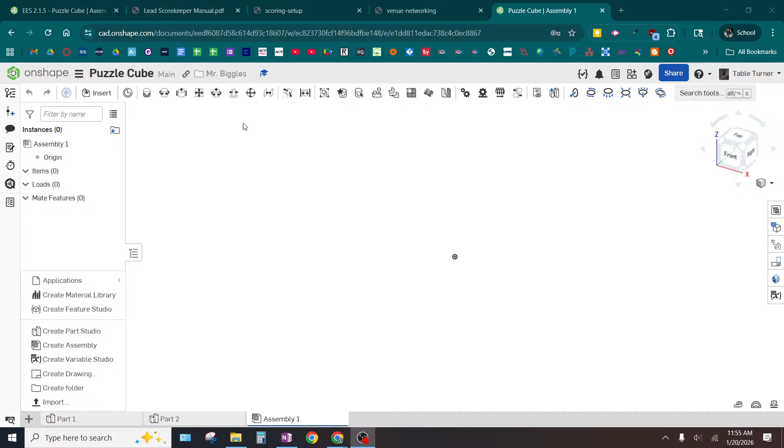I'm in assembly 1. We see that? Yep. All right. You'll notice that the tools up here look very different. And one of the buttons is insert. We see that? Yeah. And if you click on insert, what you'll notice is that there's a tab that says current document. One of the advantages of making all of your parts in the same document is that they'll show up in this first tab.

And they'll be constantly updated. And I'm going to prove this to you in a moment. You're in much better shape if you use parts that are in the same document. You don't have to, though. There is other documents. We see that. Okay, so you could pull things from other documents. It just won't update as well.

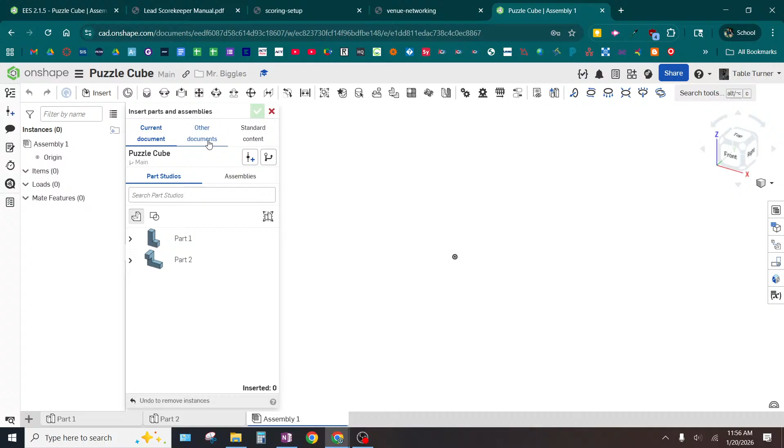And then there's part 1 and part 2. So what you can do is you can click and you can place these over here. Yeah? Okay. You can click and place those. Are we good so far? All right. I want to show you one of the advantages of doing this in current document. What color are these? Blue. They're the default blue? Yeah?

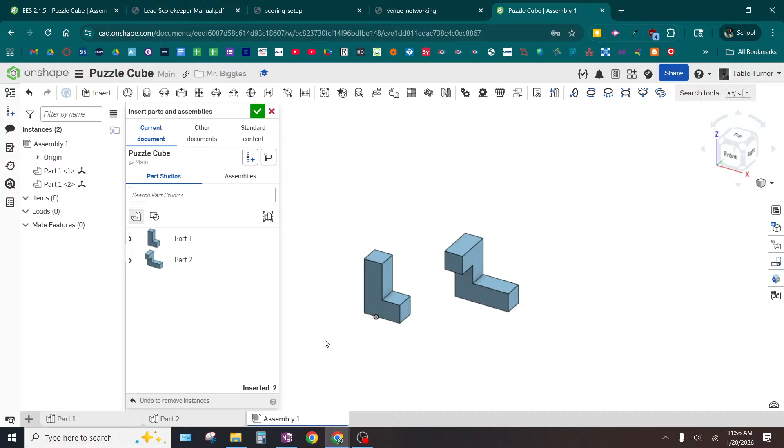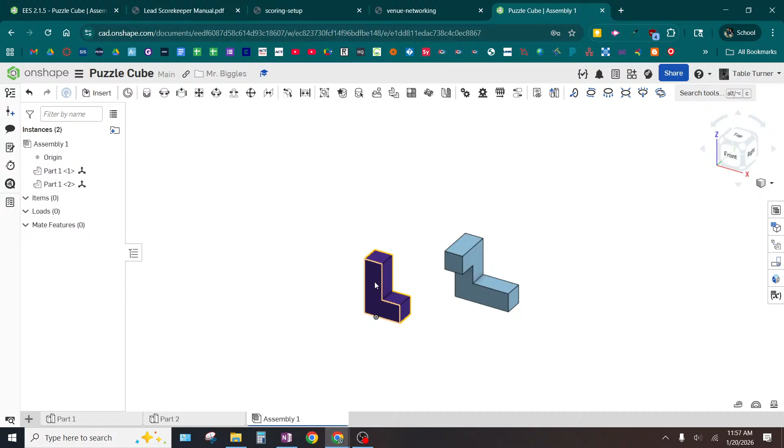Watch this. I'm going to go here and I'm going to edit the appearance. Okay, so I right click on the part, edit appearance. What color should I pick? Any color, boys? Purple. Good choice. So I made it purple. I go back to the assembly and notice how it changed and made it purple. We see that? So it will update your parts. And it does this very well when you have them in the same file.

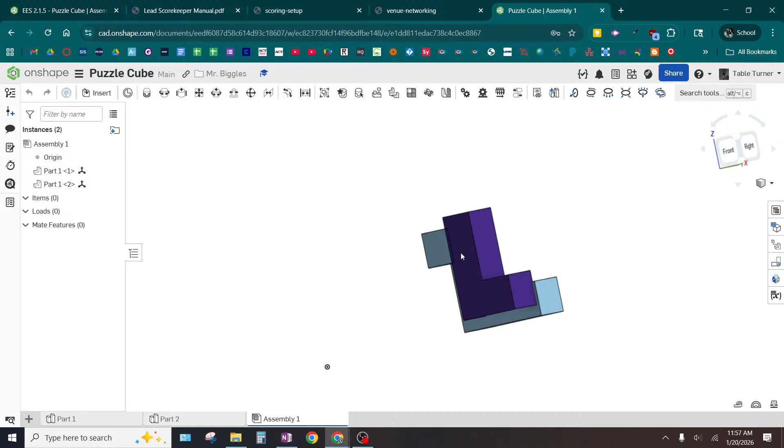So what I'm going to do is I'm going to take these parts and I'm going to position them correctly so they're locked together the way that they would be if they were actually assembled as part of the cube. I think a lot of you may have already tried this and you were manually moving them around. Yeah, how many of you were doing that? Yeah, a few of you. I have a few in my engineering class as well.

Okay. You can certainly do that, but you're never going to get lined up perfectly, right? There's going to always be these little gaps. It's never going to be perfect. What we want to do is we want to get it to be perfect. I'm going to show you how to do that today. So I want you to pick 2 parts that you are intent on joining together, okay? Pick 2 and stick with those 2. There are these options up here, and I'm going to show you just one of them today.

Let me ask you a philosophical question. How many dimensions do we live in? This is not a trick question. 3. Okay, we have 3 spatial dimensions, right? You can go up and down, left or right, backwards and forwards. In math class, we'd say x-axis, y-axis, z-axis. So here's the thing. In order to lock 2 pieces together, you need 3 constraints. How many? 3. 1 for each dimension. Does that make sense?

So what we're going to do here is, there's all these different mates here, but I want you to hover over the one that's called planar mate. It's got like 4 arrows. We see it? Okay, planar mate is when you take 2 surfaces and you force them to be lined up. You understand? That's a planar mate. Now, I can do this 2 different ways.

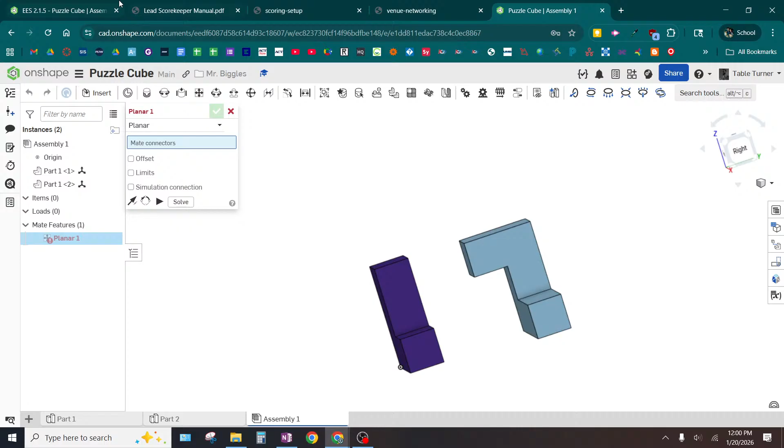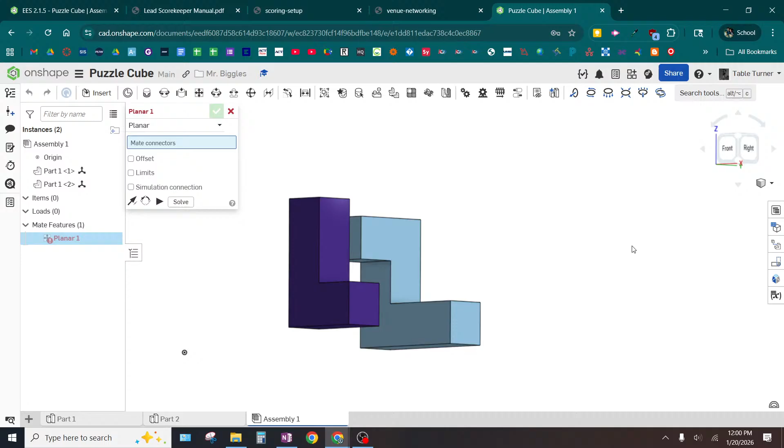One thing that may help you is to use your view cube. Click on something like right, okay? If I tilt it a little bit at an angle, if I mate them on these surfaces, here and here, that's going to constrain them in that one dimension, right? And then I have to look at the front part of the cube, pick two surfaces, look at the top part, pick two surfaces. You're going to have pairs of surfaces, and they've got to all be in different orientations or axes.

So we've clicked on the planar mate, and it says, uh-oh, did the mouse die? Spooky.

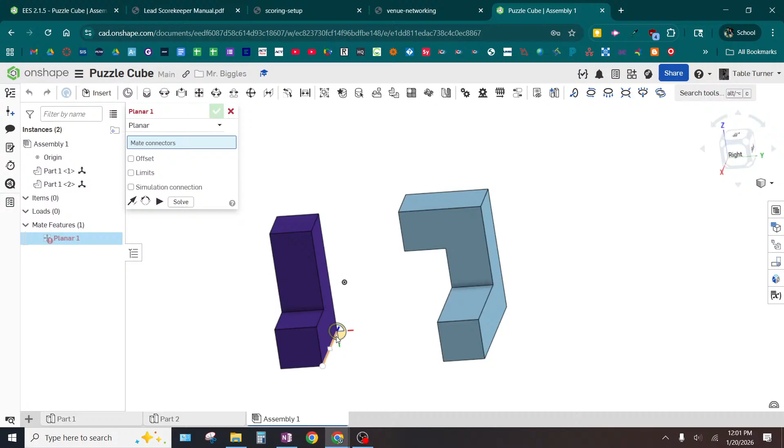So we picked up the planar mate circumstance, and I guess I'm using a touchpad. Unfortunate. What we're going to do is click on two surfaces, one in each shape. So I'm going to click on this surface here. Okay? Don't click on a corner or an edge. Make sure that you're clicking on a surface.

Look where my cursor is. I'm over the surface. We see that? Yes? Very important. It should highlight the entire edge of that surface. Don't be on an edge or a corner, because then you're mating an edge or corner. So I'm over a surface. I'm going to click once. Notice that it added that to the mate connectors.

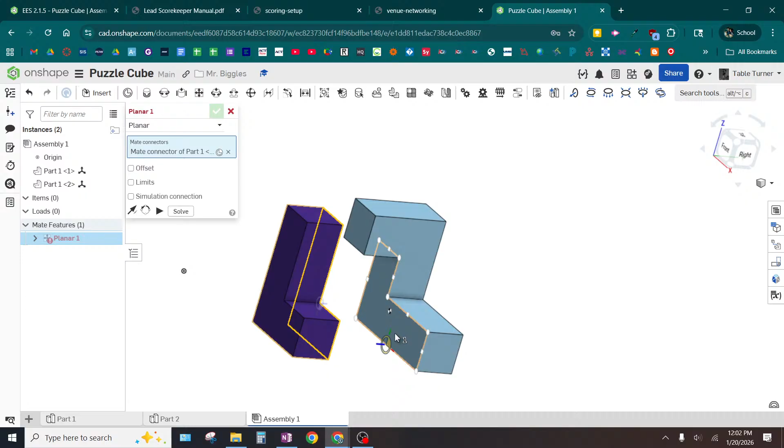And then I'm going to move my camera around, and I'm going to click on this surface. Now, I don't know what shapes you have, but hopefully you know how those shapes are supposed to attach to each other. Yes, yeah? And so you should be picking two surfaces that would be touching each other. We're good? Yeah? And then I click the green check mark.

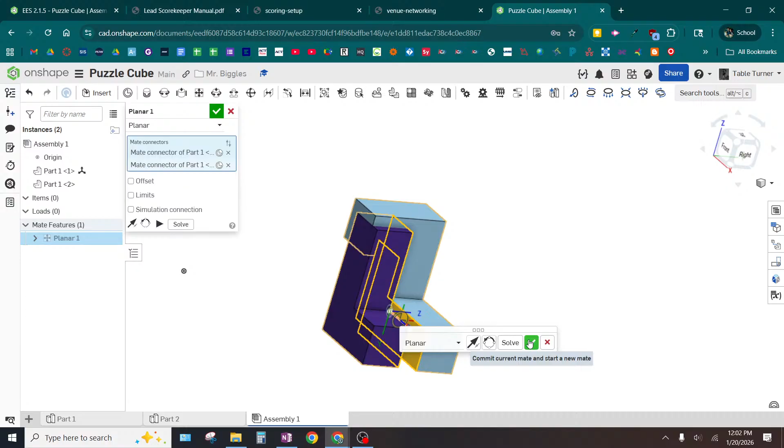Notice how these blocks are before I click it. You watching? Notice how they are after I click it. So in my case, they didn't move. That was the first mate though. I'm warning you, you need to trust me on this. Once you've already applied a mate, and especially once you've applied two mates, the preview may look horrifically wrong. But if you click the green check mark to commit it, you may find it's exactly what you want. Are we good? Maybe, hopefully, possibly.

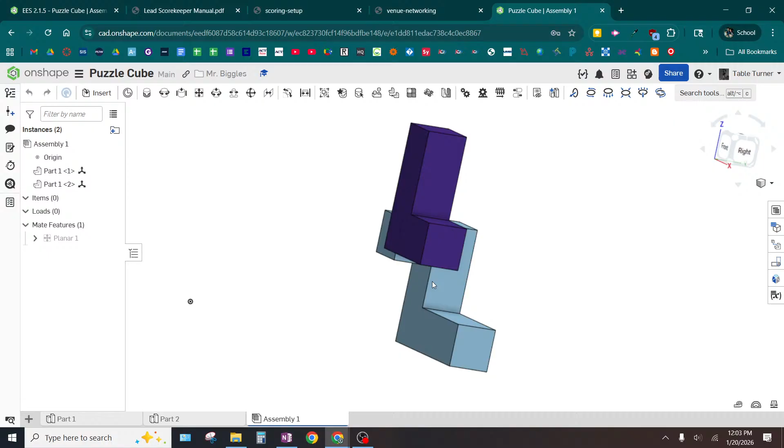So to prove what this did here, I'm going to click and drag this part. I'm going to get out of this. I don't want to do another mate right now. So make sure you're X-ing out of this, because I'm trying to click on these to move them. And if I still had that tool up, then it'd be applying more mates. So I'm going to click on this, and you'll notice that I'm able to move it up and down. You see that?

If I click on the front, I can move it this way, right? I can slide it this way. But what I cannot do is pull it away from the blue shape. That's what the mate did. We good so far? Yes? Do you have any questions before we move on?

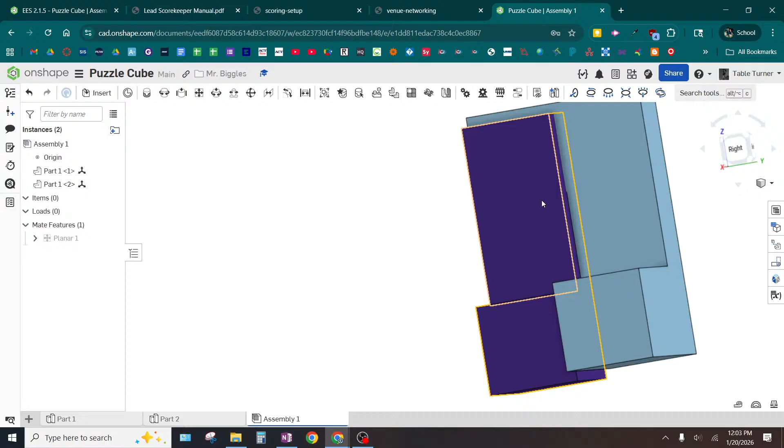Yes, sir. It won't let me move my... Well, then bring your thing here. How do you change color? You already have some mates applied. Right. So that's what those are. I just did a mate, right? Oh, those are the ones. Sorry. Oh, yeah, that makes sense. You already applied them. See that? So I can move it like this, but I can't split them apart. Were you trying to split them apart? No, it's trying to move it down. For some reason.

Next, I'm going to line up this surface right here with this surface right there. Yes, we understand? Ready? You watching? So I'm going to click on the mate tool again, the planar mate tool. It's right there, four arrows. And I'm going to click on this surface. And then I'm going to click on this surface.

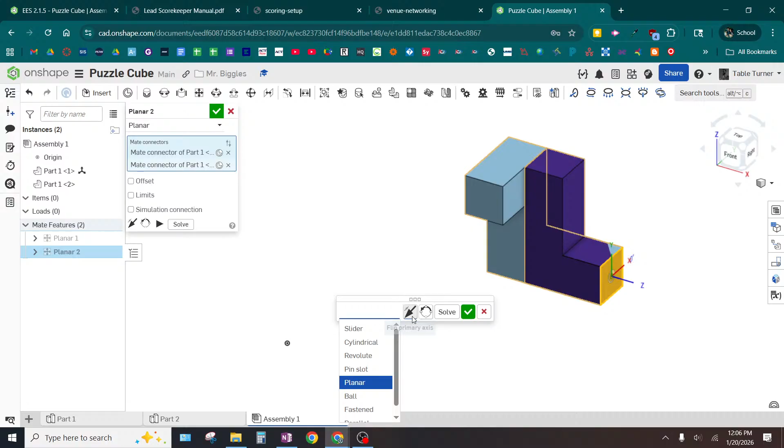Because by the time you get to the second mate, it's possible that you might have to use that, all right? I am not having to use it, though. I'm just going to click on the green check mark, and it seemed to work out pretty good, okay? It seemed to realize I wanted a flush mate. Are we good? Yeah?

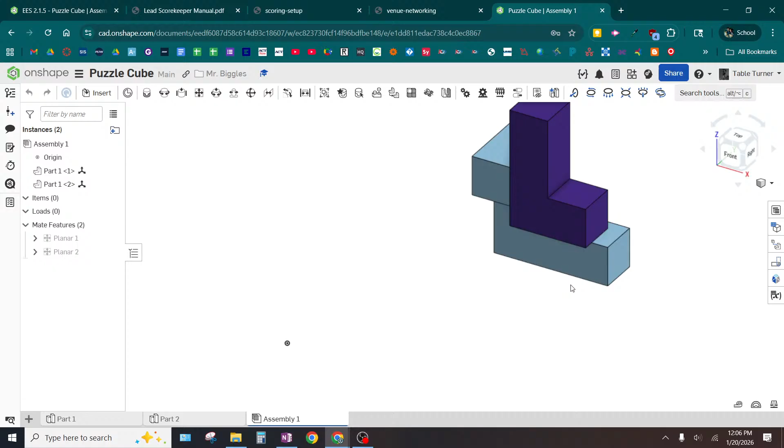So I'm going to exit out of this tool again for demonstration purposes. I'm able to move this part up and down, but I can no longer move it side to side because that flush mate made these two flush, so I can only now move this part up and down. I've constrained it in 2 dimensions. It's only free in the 3rd dimension. We understand? So the last mate I need to do, I have some choices here.

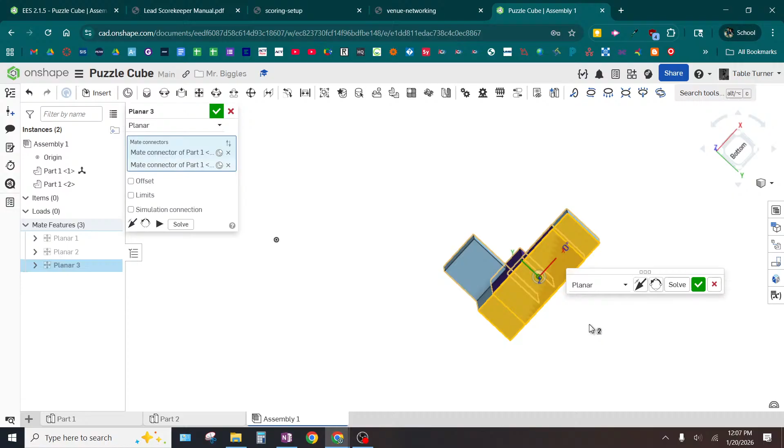I could make these two to be flush with each other, or I could do the bottom. I could make these two flush with each other. And I'm going to do that. I'm going to go to planar mate, and I'm going to click on the bottoms. Make sure you're clicking on surfaces, not edges or corners. Now, this is where I said the preview looks trash. That preview does not look like what I want at all. But just trust, I'm going to click on the green check mark. And you know what? It actually worked out beautifully.

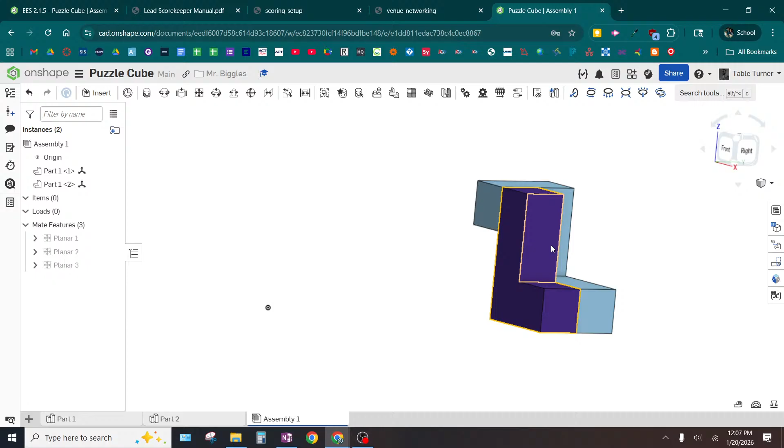We understand? So usually the first mate, the preview's fine. But by the 3rd mate, it's almost always wrong. And second, it's hit or miss. These 2 pieces are now joined together. I cannot move one without moving the other. It's not possible. I have constrained it in 3 different dimensions. It took 3 mates. We understand? Now, I'm going to make a recommendation.

You do you. Do you remember how we named the parts of the cube? Remember that? Okay, I want you to use some logic here. If there are 7 pieces in your puzzle cube, how many mates will you need? 21? No. It's close, but no. 7? No. 24? 21. It's not a bad guess, but no. 24? No. No.

How many pieces do I have right now? 27? Oh, no. How many pieces do I have right now? Can you flip to the side? How many pieces do I have right now? 2. How many mates do I use? If I were to add a 3rd piece, how many more mates would I need? 3 more. A 4th piece, I would need 3 more, right? If I had just 1 piece, how many mates would I need? 0, right? So how many mates do I need per piece?

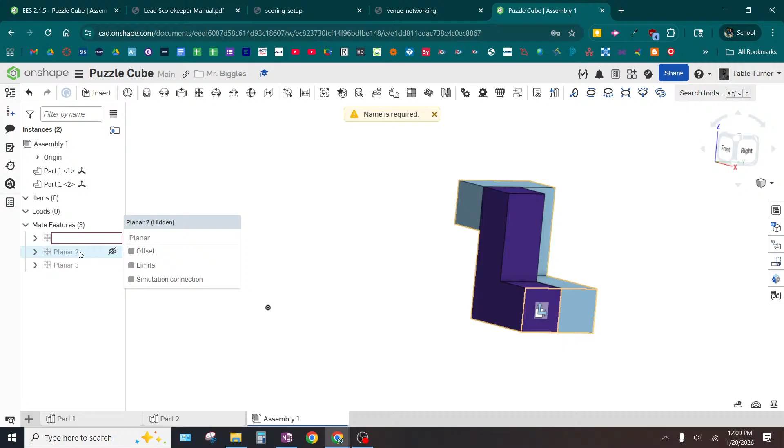18. Yeah, I would need 18 because you need 3 mates for each piece past the first, right? Make sense? So if I have 7 pieces, that means I gotta mate 6 of them to something else. 3 mates per piece, 3 times 6 is 18. Guys, that's a lot of mates. My recommendation over here, I would right click and I would rename these. There's different naming schemes, but I could call this 2A, 2B, and 2C.

You could even do 2X, Y, and Z, but you'd have to pay attention to which axis you'd mated them, and that's a lot. So I have instructed people in the past to do that, but what I found was they did it wrong. So then it did more harm than good. So I would just label them 2A, B, and C. And then when you bring in your 3rd part, all of those mates would be 3A, B, and C. Make sense? And then you at least know, if I need to fix a part, maybe what mates to go with. This is not a perfect system, but it's not the worst system.

Okay? The best thing you could do though, apply your 3 mates to the same one piece, lock it in place, then move on to the next piece. Sound good? I would not mate one piece with one mate and then bring in another piece and then try to go back and figure out what mates you need for the first. Like I wouldn't do that. I would do 3 mates per piece, lock them in 100% one at a time in order.

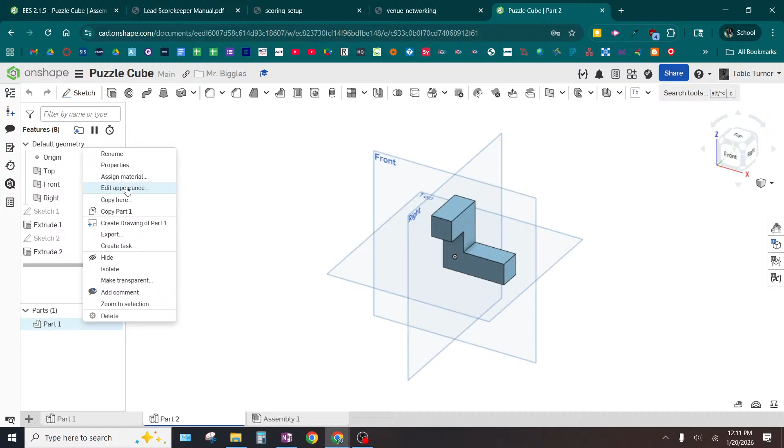Are we good? If you have not colored your shapes, I encourage you to do that. Remember, I showed you this, I proved this. You can go to the part and you can edit it. I'm doing appearance, but you could actually edit other aspects of it as well. We'll update it here. Okay. Any questions?

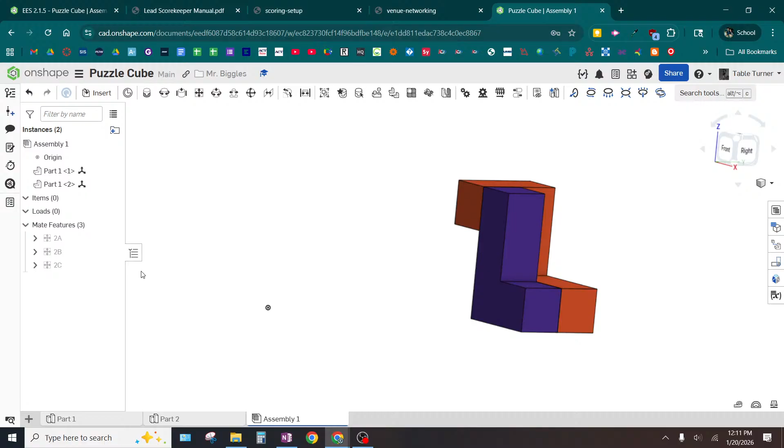Okay, I'm going to let you all work.